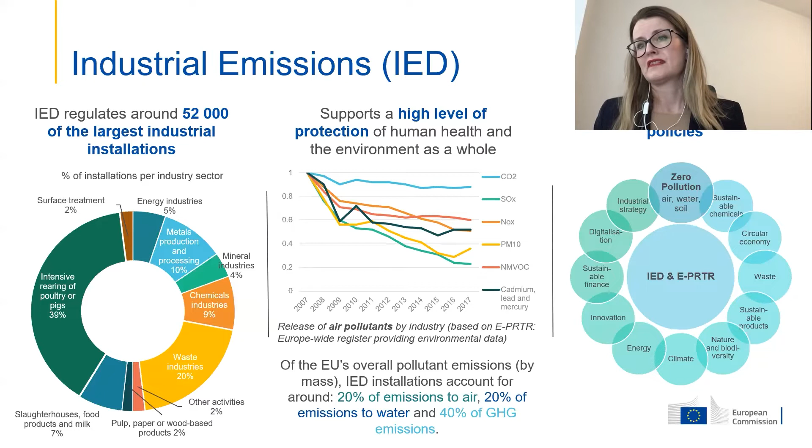The Industrial Emissions Directive and the European Pollutant Release and Transfer Register Regulation are two complementary instruments. The EPRTR regulation establishes a database with data on annual mass emissions of pollutants to air, water, and waste transfers from installations that are under the IED at EU level and wider.

The main objective of the EPRTR is to inform the public on environmental data, which also enables their participation in the decision-making process. All this information reported to the EPRTR from industrial installations is available under the Industrial Emissions Portal.

The portal now replaces the EPRTR website and is managed by the European Environment Agency. In the portal, you can find various analyses of reported data, including comparisons between specific pollutants, for example at sectoral level or at member states level, etc.

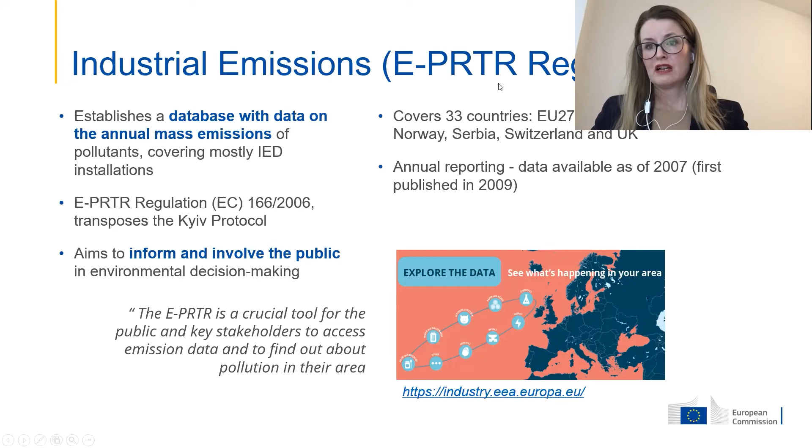Waste sector has been regulated under the IED since decades. It has been strictly regulated, maybe more than any other sector. Chapter 4 and Annex 6 of the Industrial Emissions Directive provide minimum requirements for plants that incinerate waste.

Those requirements are emission limit values, a safety net, in the form of daily and half-hourly averages. The IED also provides monitoring requirements and process conditions that have to be fulfilled, mainly related to minimum temperature and residence time to ensure destruction of harmful substances. It also provides rules for assessment of compliance with emission limit values set out in the permit.

Another chapter of the Industrial Emissions Directive, Chapter 2, obliges installations listed in Annex 1 to apply best available techniques. These best available techniques for the waste incineration sector are described in a Commission implementing decision establishing BAT conclusions for incineration of waste, adopted and published in December 2019.

This is a legally binding document, so BAT conclusions are legally binding, and permits must be updated within 4 years after publication, meaning by December 2023. After that date, emission limit values in permits must not exceed BAT-associated emission levels from the BAT conclusions. Derogation is possible, but only in specific and justified cases according to Article 15.4 of the IED, so only derogations from BAT-associated emission levels from the BAT conclusions can be possible.

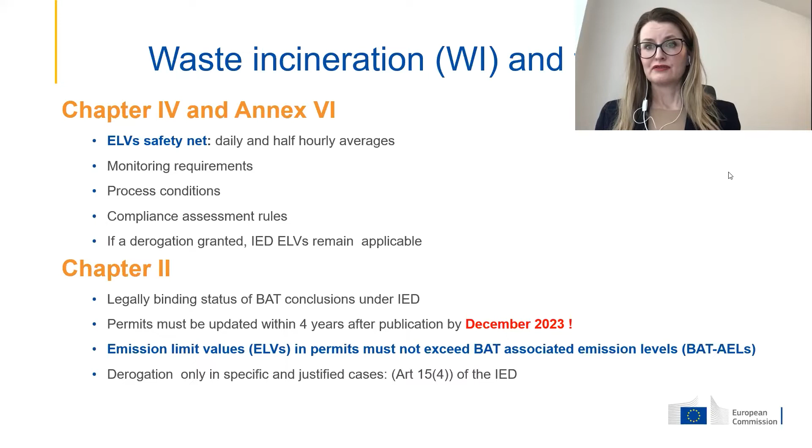This slide provides a summary of new requirements under the BAT conclusions in comparison with minimum requirements under the IED. The BAT conclusions contain BAT-associated emission limit values for air and water emissions.

These values are given in a range of emissions, and these levels are stricter than the minimum requirements under the IED. In that way, the level of environmental protection will be improved for pollutants regulated under the BAT conclusions.

BAT conclusions also provide BAT-associated energy efficiency levels, differentiating between levels for new and existing plants. There are also specific provisions in the BAT conclusions for the recovery of valuable materials from bottom ashes.

It is important to mention that provisions related to monitoring are more demanding under the BAT conclusions. In particular, this is related to toxic and persistent organic pollutants, such as dioxins, furans, and PCBs.

BAT conclusions also provide for improved sampling procedures for mercury and dioxins, furans, PCBs, and dioxin-like PCBs, which also cover conditions other than normal operating conditions. There are also requirements under the BAT conclusions for periodic monitoring of other harmful and toxic substances, and for continuously monitored pollutants, the BAT conclusions set only daily levels, daily ranges for BAT-associated emission levels.

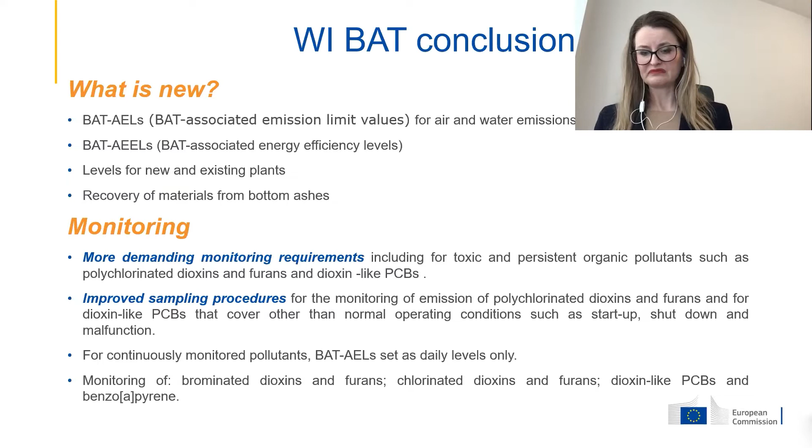I will conclude my presentation with the IED and EPRTR revision. This has been a long process, started at the beginning of 2020, and the current state of play is that we have finalized both impact assessments, and the Commission has adopted and published both proposals 2 days ago.

The objective of the revision was to transform the IED and EPRTR into forward-looking legislation, to accompany industrial transformation but also to fulfill the ambition under the European Green Deal and Zero Pollution Action Plan.

The proposed amendments to the IED and EPRTR aim to enhance the IED's effectiveness, to support innovation, to enable circular and resource efficient and less toxic production, but also to support decarbonization. On top of this, the new proposals are also widening the scope to ensure that both IED and EPRTR sectoral coverage is up to date.

I would like to highlight a few aspects now introduced by the new amendments, related to increasing the ambition in permits to ensure that the whole range of BAT-associated emission levels is used.

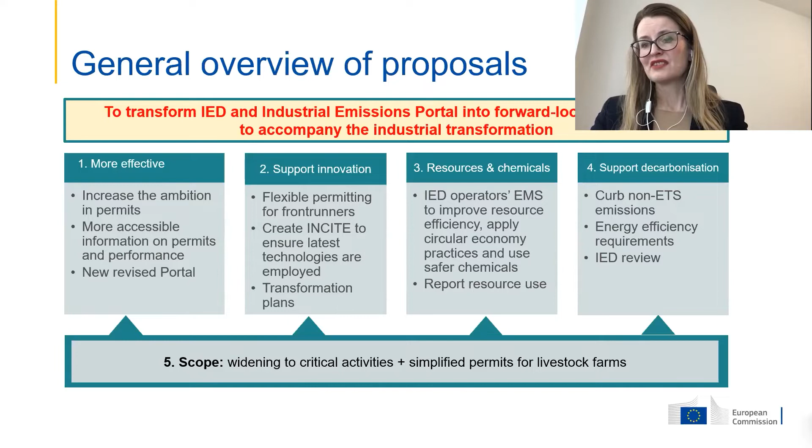So with this, I would like to thank you for your attention, and I will be happy to answer any questions later. I give back the floor to the chair of this webinar.

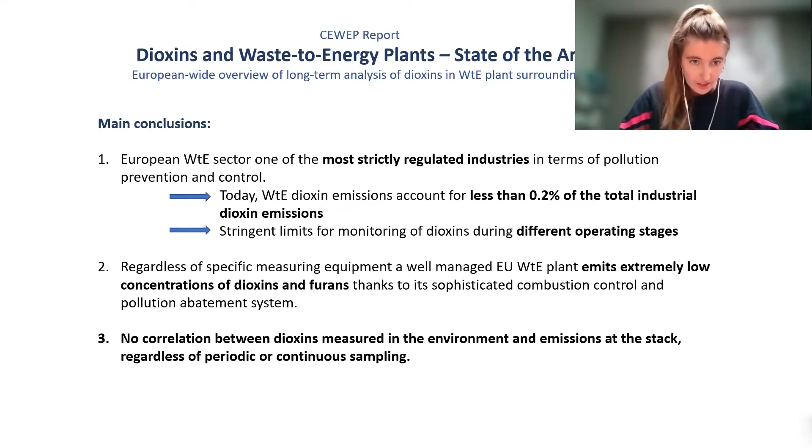Next slide, so we can go into more detail for the first conclusion. As mentioned, the sector has long been associated with dioxins, but since 1989, European waste-to-energy plants have been subjected to specific stringent legislation to prevent and control pollution. Throughout the years these requirements have been continuously tightened, and in 2019 the waste incineration BAT conclusions, as previously mentioned, went even further and set more ambitious targets regarding dioxin emissions. It is also specified that emissions must be monitored during conditions other than normal operating conditions.

It is very clear that this has led to a great historical decline, as well as other sources of dioxin emissions becoming more prominent. This can also be observed in the graph on the left, put together by the European Environment Agency, where the waste-to-energy sector is included in the energy production label, colored red. It's maybe not very clear, but you see it very prominently in the beginning of the graph, and then not so much later on. So their contribution has declined significantly.

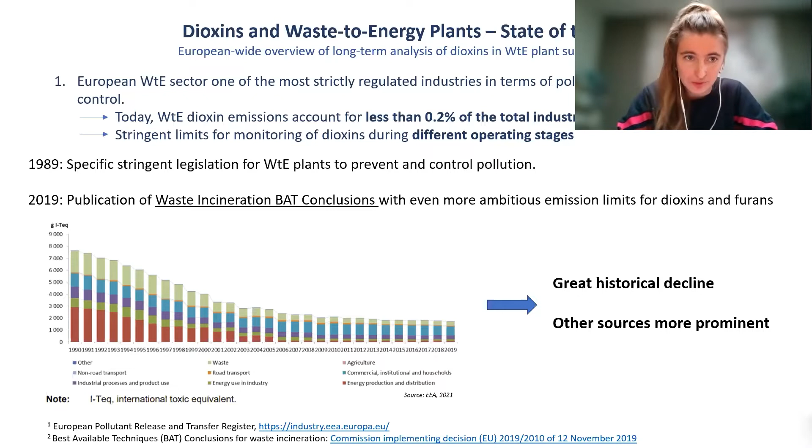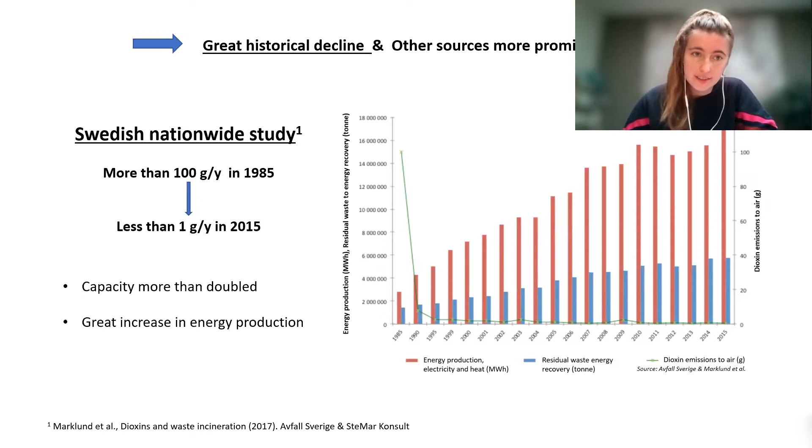Next slide. This goes a bit more into detail on the drastic historical decline with a specific case study from Sweden. To dive straight into the numbers, they went from more than 100 grams of dioxins emitted per year in the mid-1980s to less than 1 gram per year in 2015, clearly illustrated by the green line on the graph. You must also take into account that these low emission levels are maintained while the sector's capacity has more than doubled.

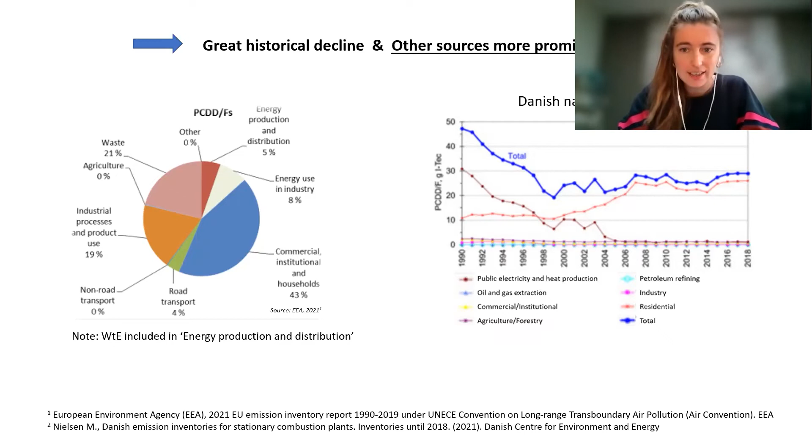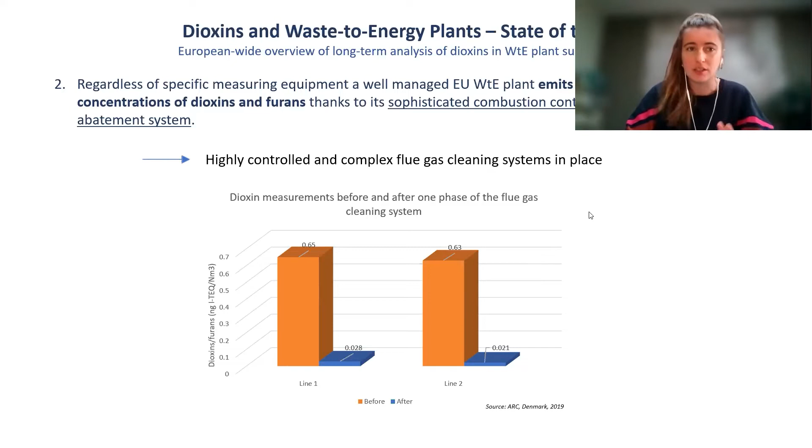For the second conclusion, it mentions the extremely low dioxin emissions due to the sophisticated combustion control and pollution abatement system. Simply put, waste to energy plants have highly controlled and complex flue gas cleaning systems in place. To illustrate this, you can see in the graph dioxin measurements before and after one step in the cleaning system. Orange is before, blue is after. It's quite clear that there is on average a 96% reduction for only one phase in the system, so it really is very well controlled. These measurements were also taken in flue gas cleaning systems of a waste to energy plant in operation.

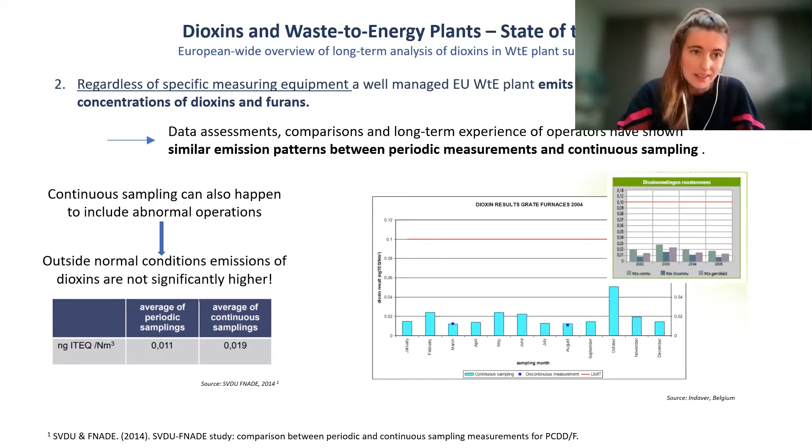Next slide. The conclusion also mentions that the low emissions are measured regardless of specific measuring equipment. This means similar emission patterns between periodic measurements and continuous sampling are found. If you're not familiar, periodic measurements of dioxins are sampled over a short period, like 6 to 8 hours, while continuous sampling is carried out over longer periods, ranging from 2 to 4 weeks. These longer periods can also happen to include conditions outside of normal operations, for example startup or shutdown. When comparing the averages, the measured dioxin emissions are not significantly higher, meaning the same results are obtained with either monitoring method.

Next slide. Now we arrive at the last conclusion, which reads that there is no correlation between dioxins measured in the environment and emissions at the stack, regardless of periodic or continuous sampling. The sampling part we've already covered, but it's quite interesting that while environmental samples provide a value for the amount of dioxins measured, it does not necessarily determine the emission source - more on that later, because this is an important point. Furthermore, the report includes different examples of biomonitoring for dioxins executed by waste to energy plants. I will not go into detail, but it includes sampling of soil, sampling of existing vegetation, or vegetation grown specifically for the purpose.

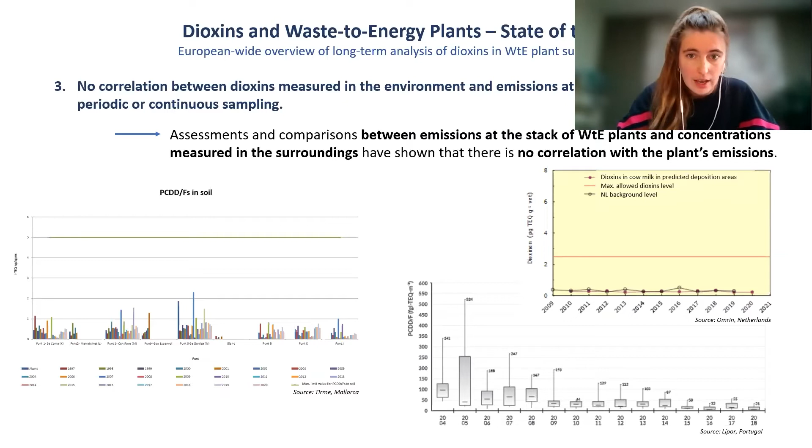Next slide. Here I want to go into more detail because it's quite an important point. Going back to the challenging task of identifying the emission source, it must be noted that it's not possible to guarantee the source of dioxin emissions solely based on the levels in biomarkers. Plus, the pollutant concentrations found in the sample can originate from both recent sources and also historical pollution, as dioxins accumulate in the environment over time.

For some processes, it is actually possible to identify the source based on congener patterns. Congeners are chemical compounds, or simply put, building blocks that are related to each other and can give more information on the origin of the chemical compounds. As dioxins cover a group of more than 200 compounds, you can set up a congener pattern for a sample, but also for an emission measurement.

This is the case, for example, for pulp bleaching. But for incineration of municipal waste, this is however not the case. And to go even further, all combustion processes show similar congener patterns, regardless of the input waste. Similar patterns have also been found in metallurgic industrial processes. So the pattern on the right shows that it doesn't differ significantly from the pattern for traffic emissions.

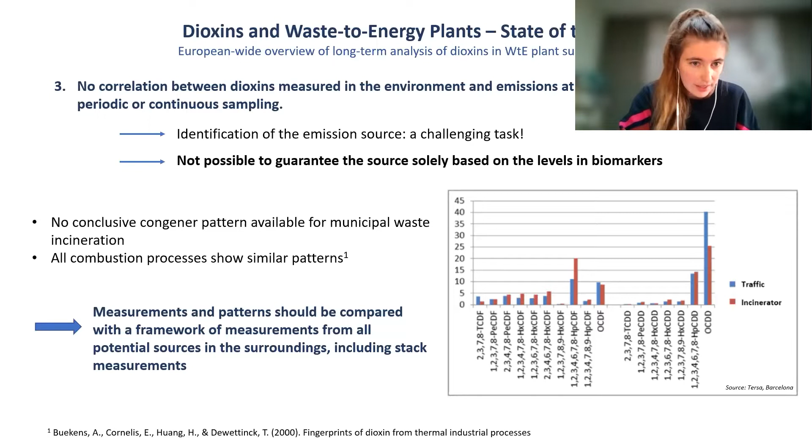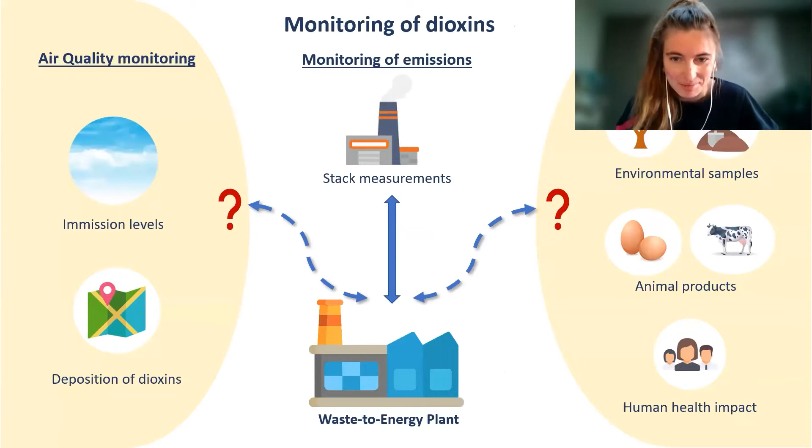This is my last slide, but it's just a quick overview of the direct emissions that are directly linked for monitoring, and then the environmental samples or air quality monitoring, where you're unsure how to identify the emission source. It's a bit wrapped up at the end, but I think that is it for me. Thank you for your attention. If there are any more questions, I'll be happy to answer them later on.

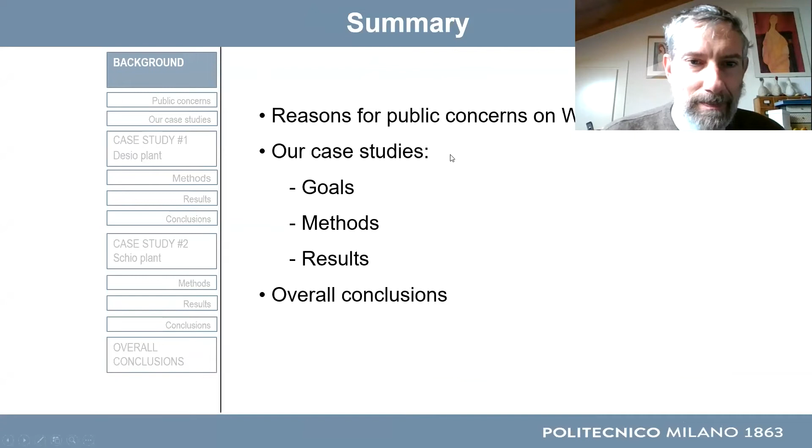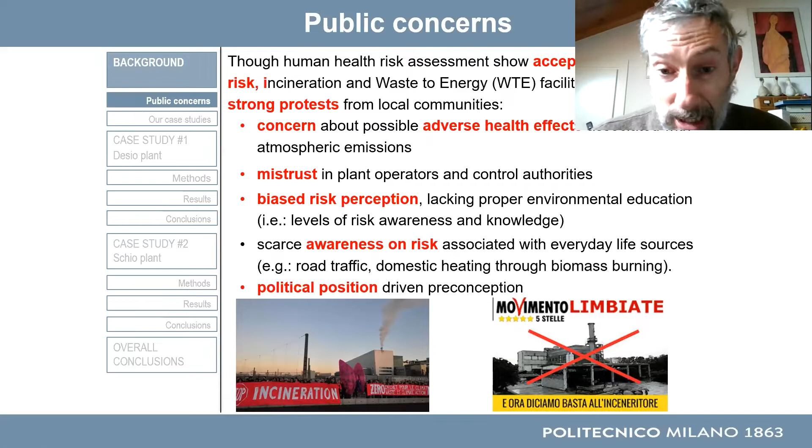I think that all of you are aware of the different kinds of public concerns against WTE plants. I would like to stress the point of awareness on risk that sometimes is not so clear in public opinion. People may be more keen to be afraid of things like WTE plant emissions than other common activities we have, like road traffic or domestic heating, namely when we have biomass burning.

I will show you some outcomes of a couple of studies we had, two case studies in Northern Italy. These studies had a common goal: to assess the real impact of the plant on local air quality. They shared common methods, namely from the dispersion modeling standpoint we used the CalPuff model. Another important point was that we based our simulation on real emission data taken from the continuous emission monitoring systems. In these two case studies, we had two different goals.

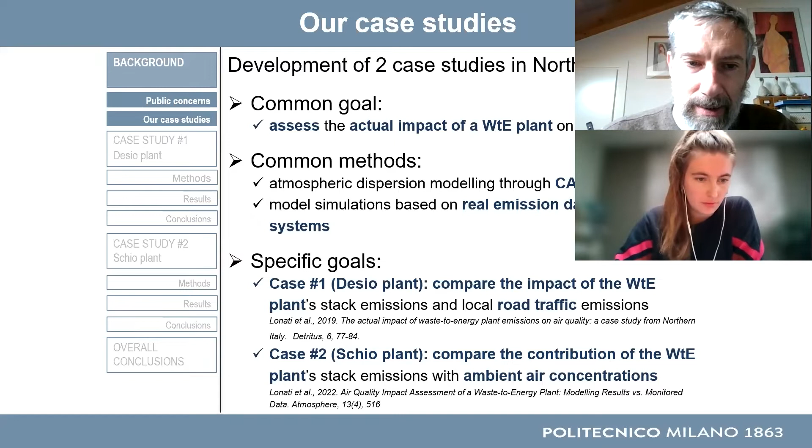In case 1, the study was intended to compare the impact of the plant emissions with local road traffic emissions, so it was just a simulation exercise. In case 2, the idea was to compare the estimated contribution of the plant emission through modeling with monitoring data, in order to have some idea of the relative contribution of the plant emissions to the actual air quality conditions.

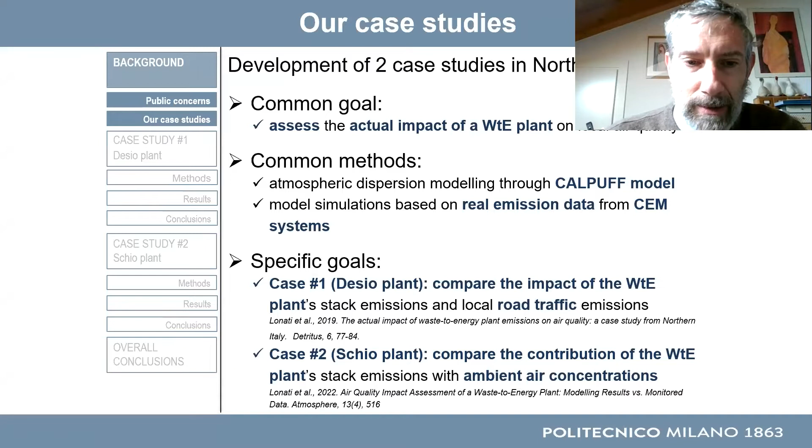I will go very fast on the results, but if you want detail, all these studies have been published. They are on open access journals, so you can have a look and find all the details you may be interested in. Next, please.

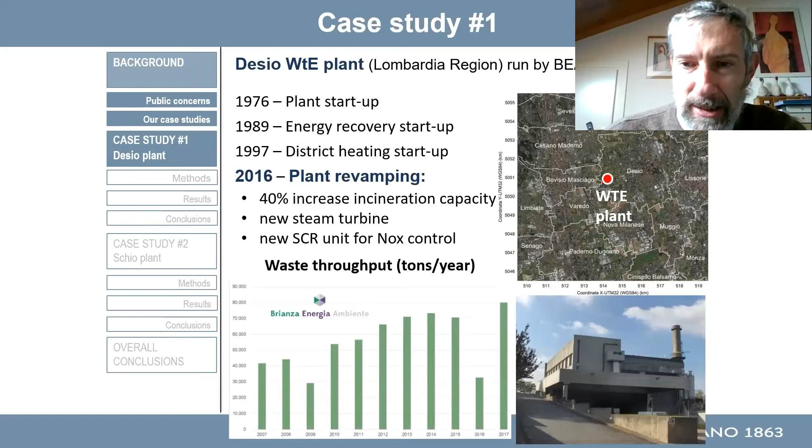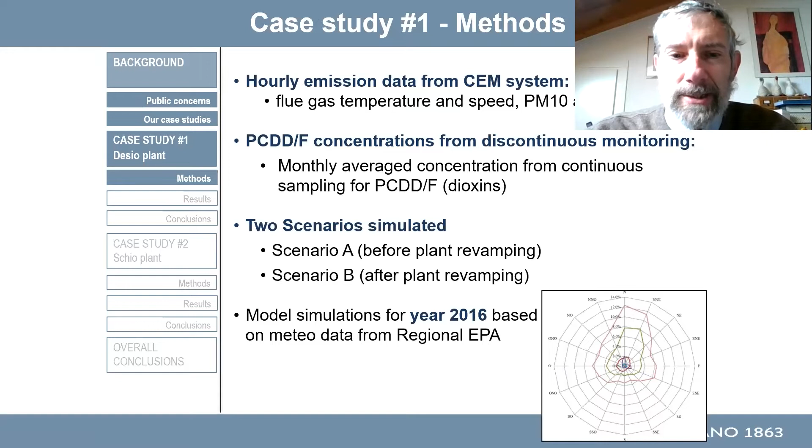The plant is located north of Milan in the Lombardy region. As I mentioned, we took data from the CEM system, and for those pollutants that are routinely measured, PM10 and NOx, we relied on hourly emission data; for dioxins we used discontinuous sampling data. We had simulations for calendar year 2016.

Here you can see that the revamping of the plant resulted in a decrease of emissions on average and in absolute terms, in maximum levels, from scenario A to scenario B, except for PM10, because we had an increase in waste throughput. So there was a mismatch between increased emissions and controlling, which was not addressed because the intervention focused on NOx.

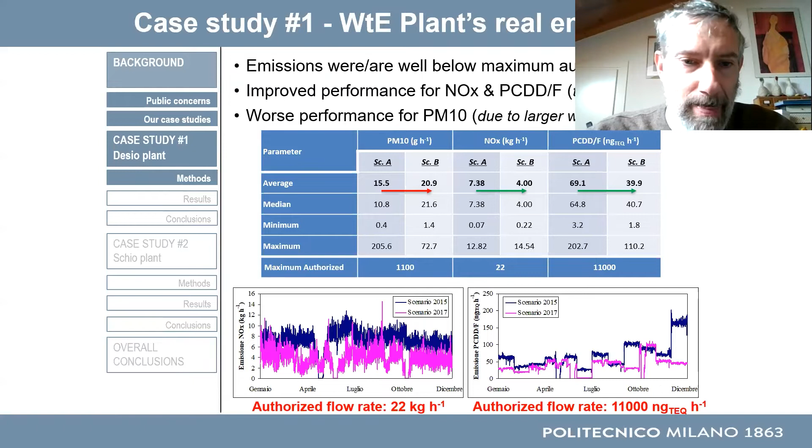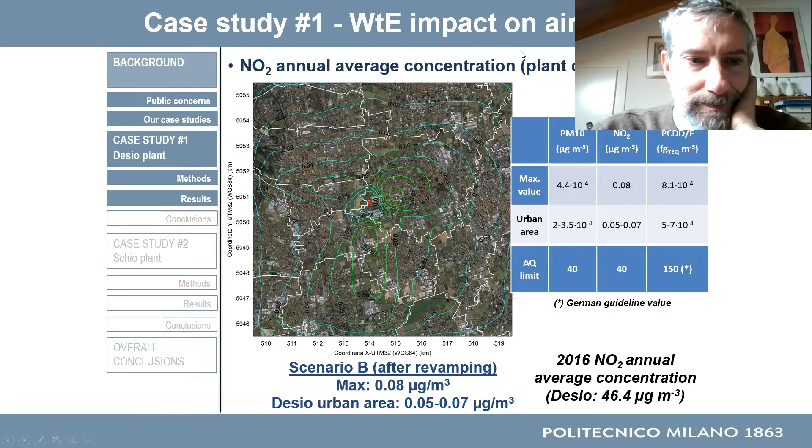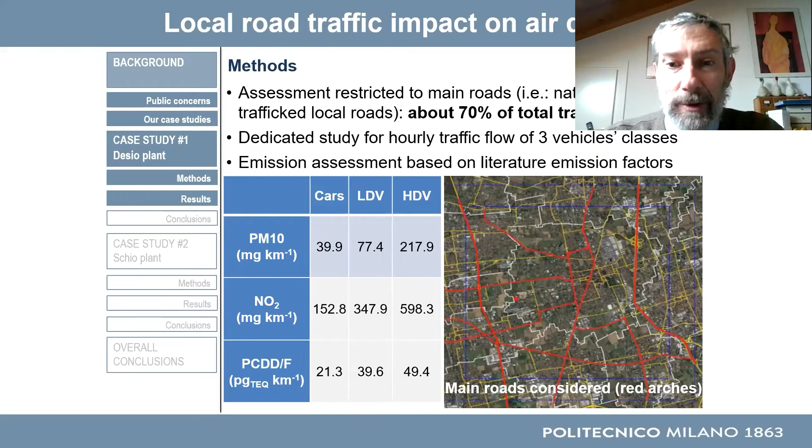You see that the impact of road traffic is in the order of dozens of micrograms per cubic meter at the maximum fallout point, whereas in the urban area it's in the order of some micrograms per cubic meter, compared to a 100 times lower contribution from the waste-to-energy plant. It's the same or even more in the case of PM10, where the ratio is 10 to the minus 4.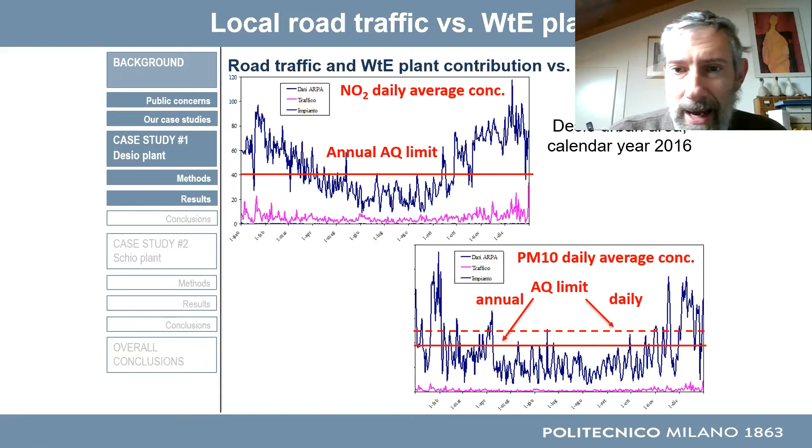To summarize the conclusions from this first study: the revamping of the plant resulted in a positive effect in terms of reduction of emissions, and also reduction in specific terms, per ton of waste burned. So not only in terms of concentration, but in terms of efficiency of the process.

We also saw that the contribution of the plant to overall air quality is very low, and very low also in relative terms compared to local traffic—when I say very low, I'm dealing with orders of magnitude. This applies not only to criteria pollutants but also to organic and inorganic compounds. We also investigated cadmium, not shown here, together with dioxins, but we had the same results in terms of relative, comparative contribution.

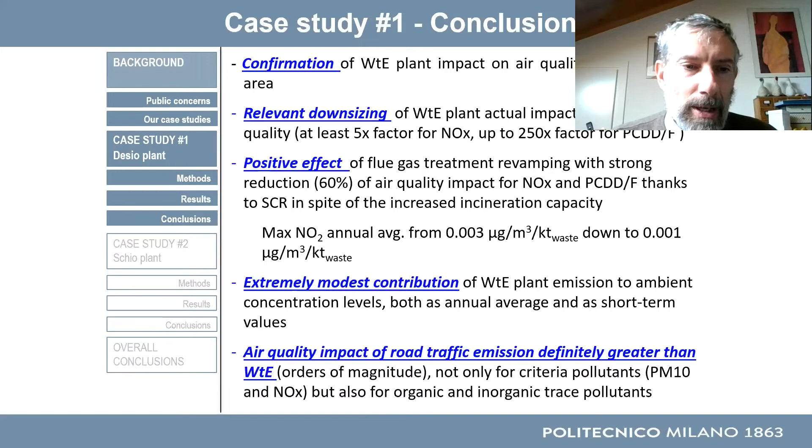The second was for a plant in the Veneto region, close to the mountains, with state of the art equipment, including SCR and the traditional dry treatment line, on 3 separate combustion lines, with a throughput of about 230 tons per day of waste.

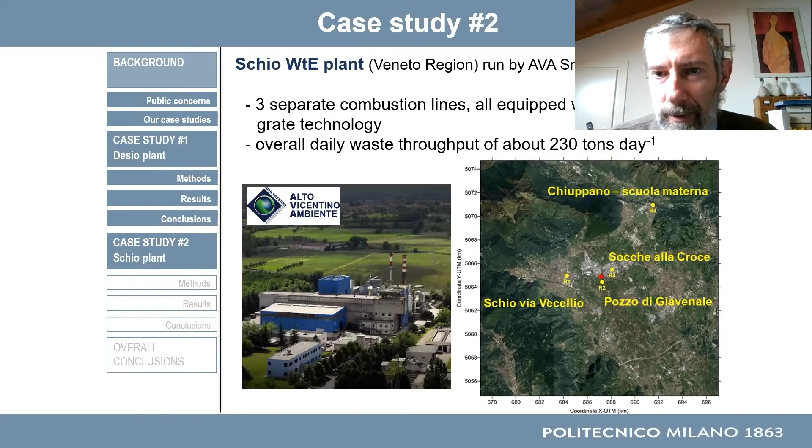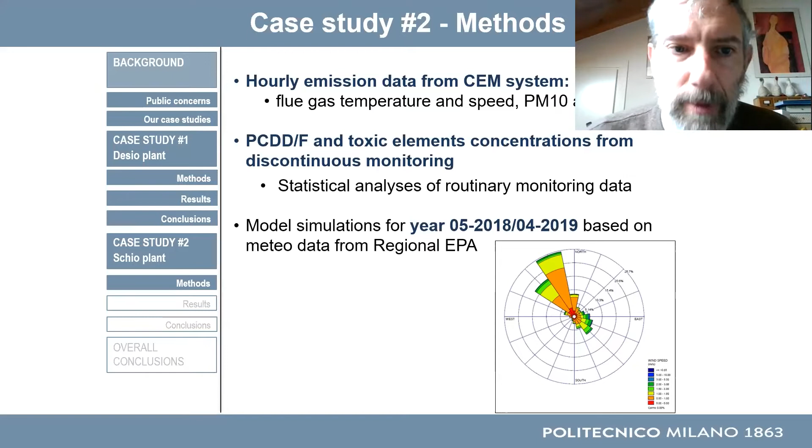We used the same methods. We relied on meteorological data. Actually, it was not a real calendar year because we were in between 2018 and 2019, since this was requested by local authorities. We also took data from routine monitoring data for PCDD/F and toxic elements.

We used discontinuous sampling, and we ran some statistical analysis, for example for dioxins, to properly describe the real emission conditions for these pollutants. Of course there is some variability, so we wanted to investigate this, not just take one single value, but make some deeper inference.

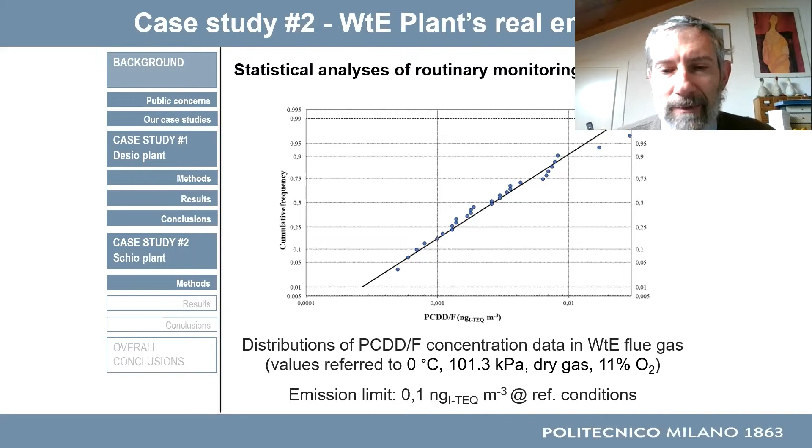We had monitoring data from institutional monitoring run by the local environmental agency for both criteria pollutants, continuous and periodic sampling, with daily samples throughout the year. That's about 60 to 70 daily samples over the entire study period, which is actually a year. We also had data from dedicated monitoring campaigns we performed for the managing company of the plant, and some other campaigns run by ARPA, the local environmental agency. These campaigns focused on toxic elements, benzo[a]pyrene, dioxins and furans, and also mercury.

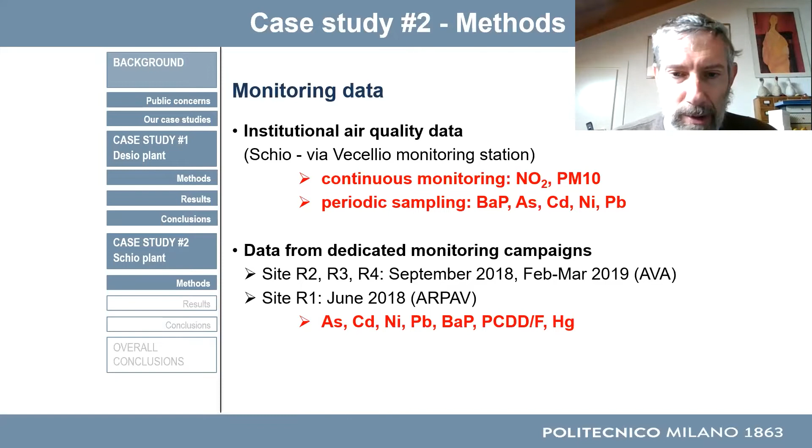I will not show it here, but we also had some total gaseous mercury monitoring.

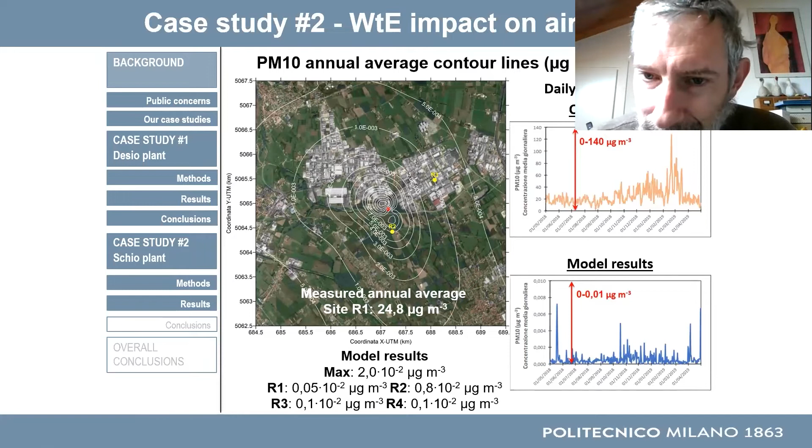The same, or even more so, for PM10: the greater the difference, the smaller the contribution of the plant. We are maximum in the terms of 0.01 micrograms per cubic meter, compared to normally 20 to 40 micrograms per cubic meter for ambient air, with some peaks up to 100 in critical conditions. So we have further confirmation that the impact of the plant is very small, as we saw in the previous case.

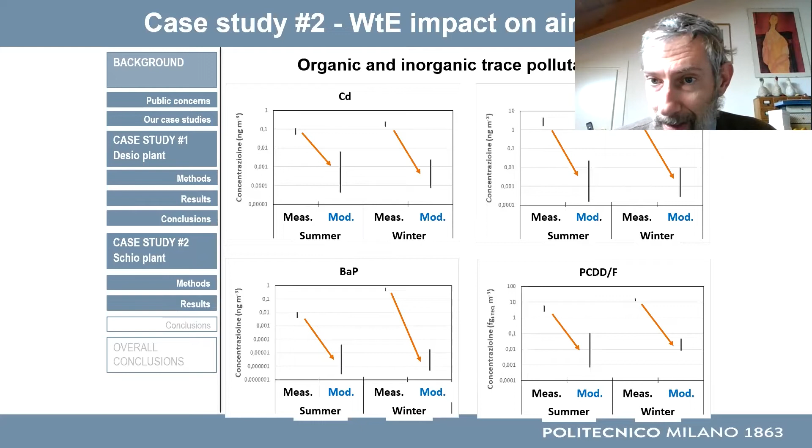This is also true for dioxin, where there are at least 2 orders of magnitude difference. So once again, the contribution of the plant is really marginal compared to ambient air levels. Actually, it's the complex of all activities in the area - residential biomass burning, road transport, and some industrial processes in that location - that are the most significant contributors to pollution levels at the local scale.

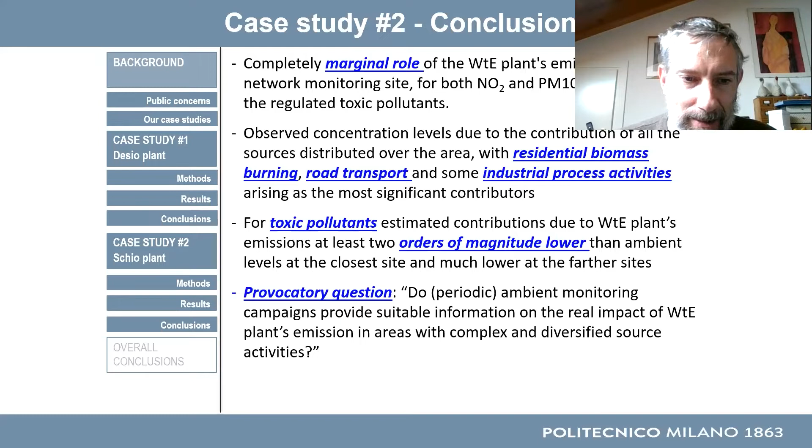I'd like to raise what I call a provocative question, which came out of discussion with the local air quality agency: does it make sense to have short monitoring campaigns, just snapshots of air quality, as far as dioxins and some toxic elements are concerned? Or, more formally, do periodic monitoring campaigns provide suitable information to really assess the impact of the plant when you are in a complex area with many different sources? We had some debate about that, and I will try to make a suggestion in my final slide with the overall conclusion.

And the conclusion is that, maybe in the last bullet point, monitoring coupled with modeling may be a good tool to assess and to keep control, or to have information about the real impact of the plant.

I would like to mention that in our simulation, we took continuous monitoring system data as they are, so there was no further processing, as sometimes happens, in order to not consider transitory periods or whatever. So we took all data measured and we modeled that, in order to really assess, or if not the real, the most close to the real impact of the plant.

And the final point is that, of course, the plants we studied in our case studies were not very big plants, but they were state-of-the-art, recently revamped with state-of-the-art technology, according to best available techniques.

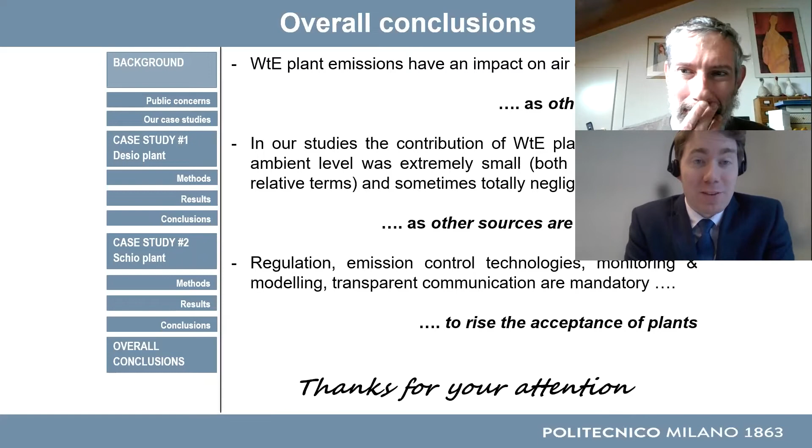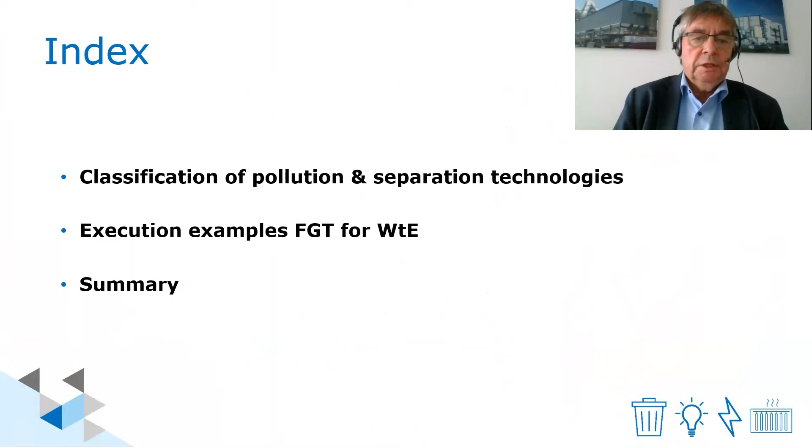Good morning, everybody. The topic of my presentation is flue gas treatment for waste to energy plants, the used technologies. I want to start with the classification of pollutants and an introduction of separation technologies, followed by some execution examples with measured values, and a brief summary.

You can classify all these compounds into, let's say, 4 or 5 classes. The first part of flue gas treatment starts already in the combustion zone with oxidizing CO and organic compounds, and all the other classes are mainly removed in a flue gas treatment downstream of the waste to energy plant, or the heat recovery boiler, or even inside of it.

So the first class are the pollutants in solid form. This is fly ash, heavy metals in solid form. Then we have pollutants in gaseous form, that's the acid components, HF, HCl, SO2. These compounds are removed by adding an additive, which gives a chemical reaction, and you form salts, which you can then easily remove in solid form.

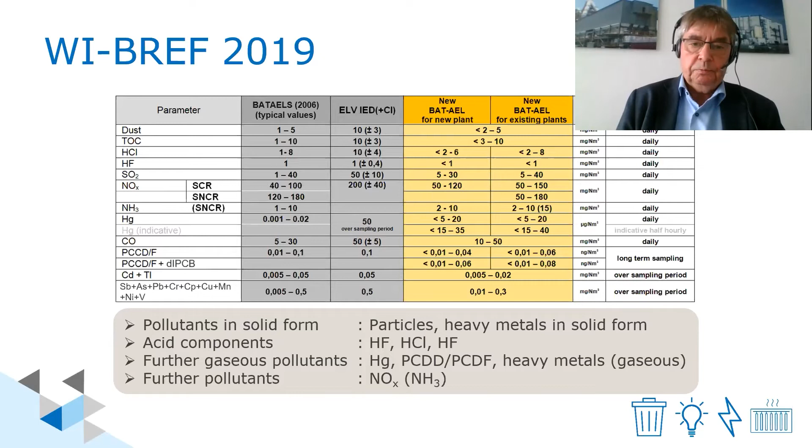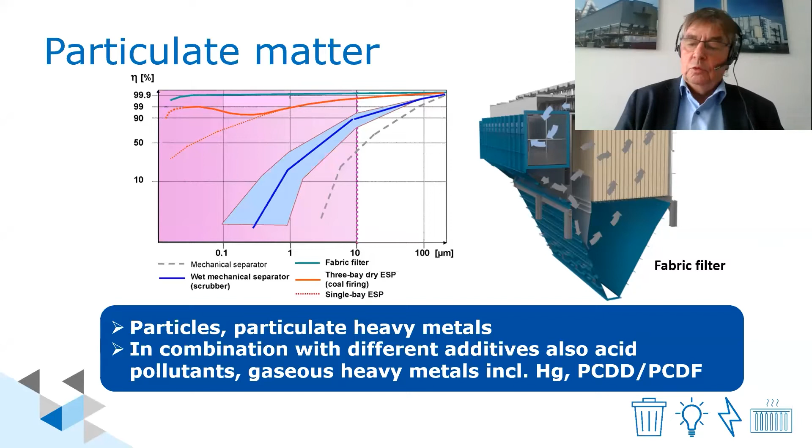As already mentioned, you can remove the pollutants in solid form, but also pollutants in gaseous form, if you convert these pollutants to solid form, as you do in these sorption processes. Here you have different options.

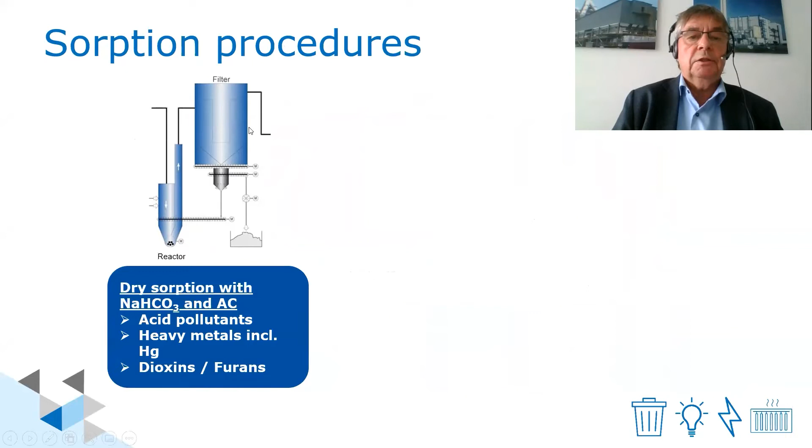The first one is a dry sorption process using sodium bicarbonate. This is baking powder, for the acid, and active carbon for mercury and PCDD, PCDF. It consists of a reaction chamber where you introduce the additives, a filter, and a multiple recirculation.

The second option you have is a conditioned dry system. Instead of sodium bicarbonate, here you use hydrated lime. You see more or less the same scheme: the reaction chamber where you introduce the two additives, the bag filter, multiple recirculation. The difference is that you moisturize a little bit, recirculating particles to improve the efficiency.

Last but not least, you have, of course, the option of a wet system, wet scrubber based on sodium hydroxide or even limestone.

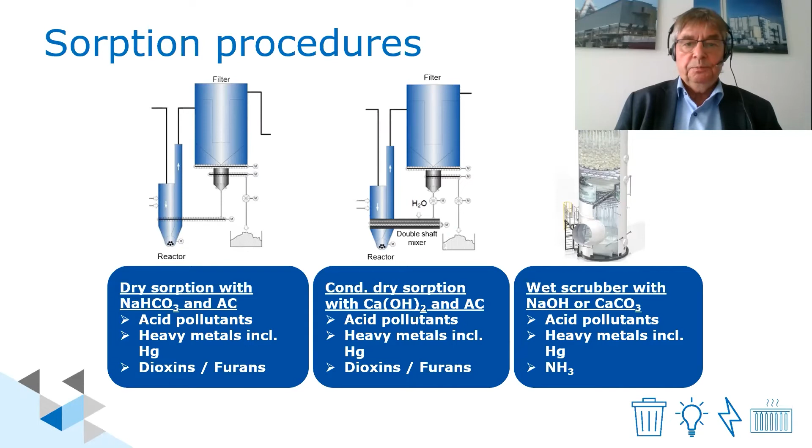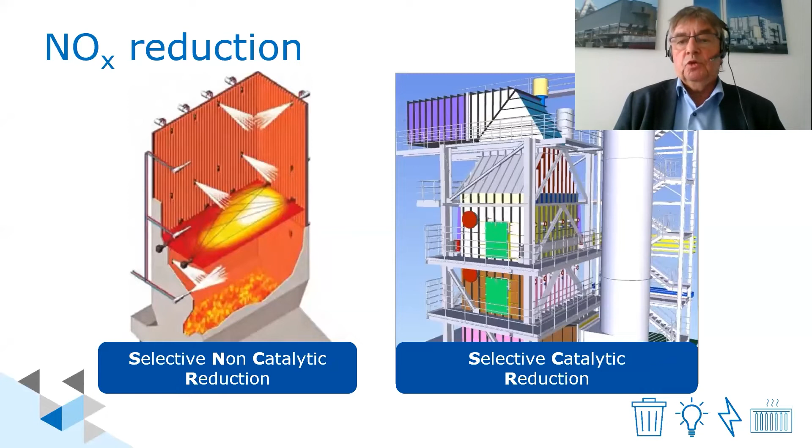Last group are the NOx, which has to be reduced to N2. This you do with injecting ammonia. You have two options: the first is to do it in the combustion chamber at hot temperatures in a selective non-catalytic reduction, or the other option is to do it within the flue gas treatment system downstream of the heat recovery boiler, where in the temperature range of 200 to 240 degrees you need a catalyst system to support the reaction.

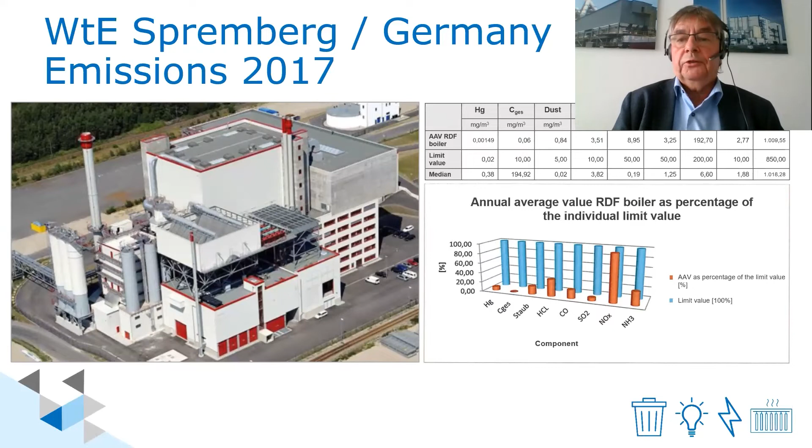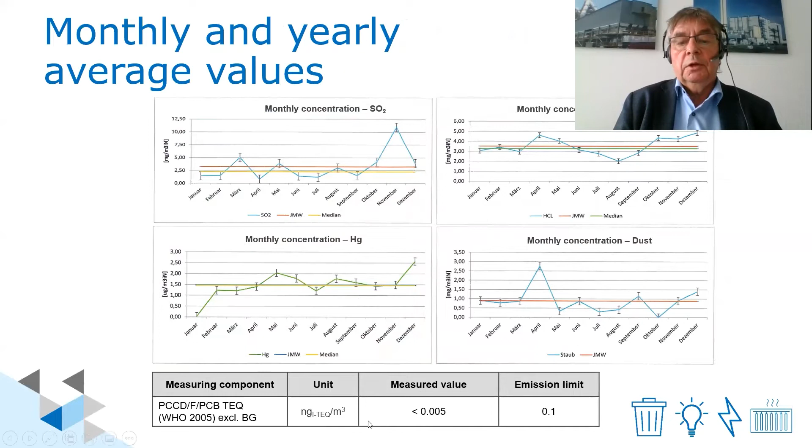I have here for 4 of these compounds also the monthly concentrations for SO2, HCl, mercury, and also for particulate matter. What you can see is that there are variations over the months of the year, but all the values are far below the requested emission limit values. I added here from this report as well the dioxin measurement.

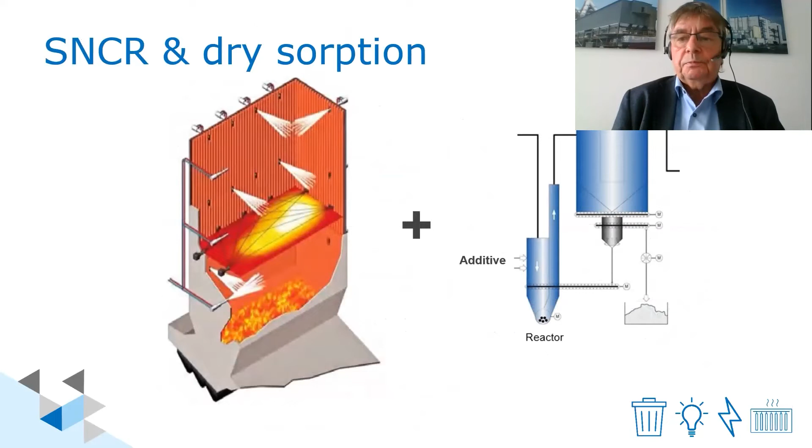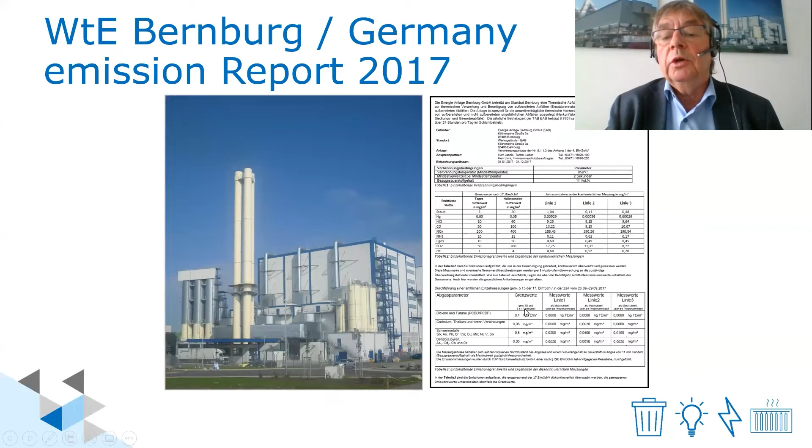Second example is an SNCR technology with dry sorption, meaning usage of sodium bicarbonate and activated carbon. Also here, an emission report from 2017. It's a plant with 3 lines. As well here, you see in this part all the continuous measured values, and here the values measured by sampling periodically. If we look, for example, for this dioxin or the heavy metals, they are all far below the requested emission limit values.

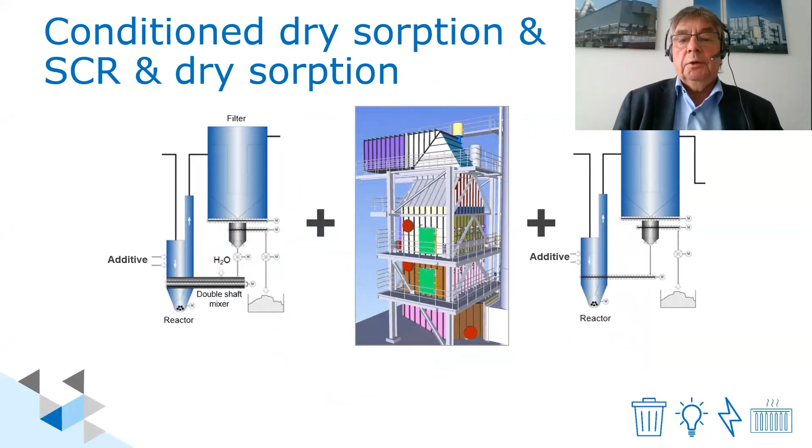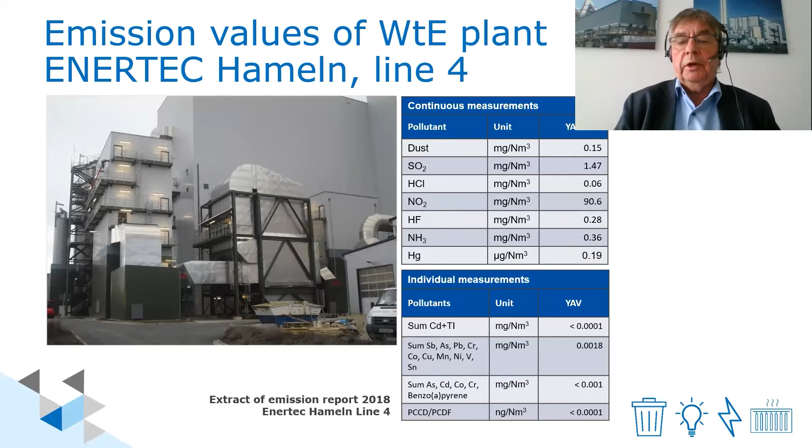Same for these compounds which are measured by sampling. Last but not least, one more example, and this is a combination of SNCR, conditioned dry system, and a wet scrubber. This is a very common combination of technologies used in the north part of Europe, because in the last stage, the polishing scrubber, you can remove highly efficiently the remaining HCl and SO2, the acids, and this in combination also with heat recovery, because you can use the condensing heat generated here in the water of the scrubber, in the water loop of the scrubber, and give it to district heating. This gives you a very high energy efficiency as well.

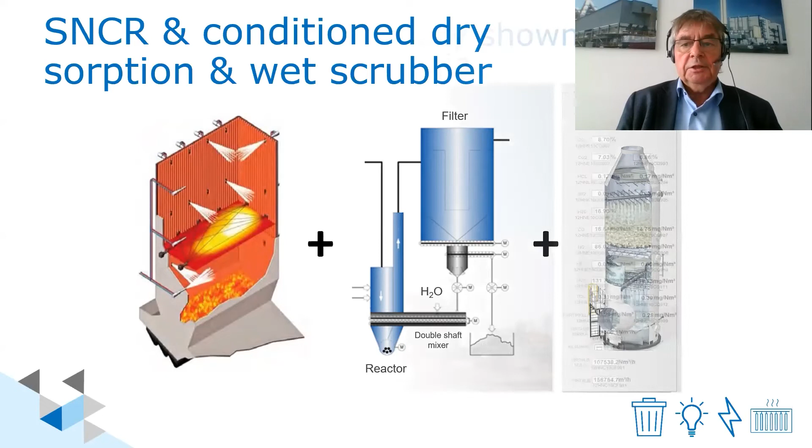A very brief summary: there are several different technologies available to remove pollutants, and these technologies are listed in the waste incineration BREF as BAT. All these combinations of technologies in operation reliably fulfill today's and future requirements. The selection of technologies is made depending on the application.

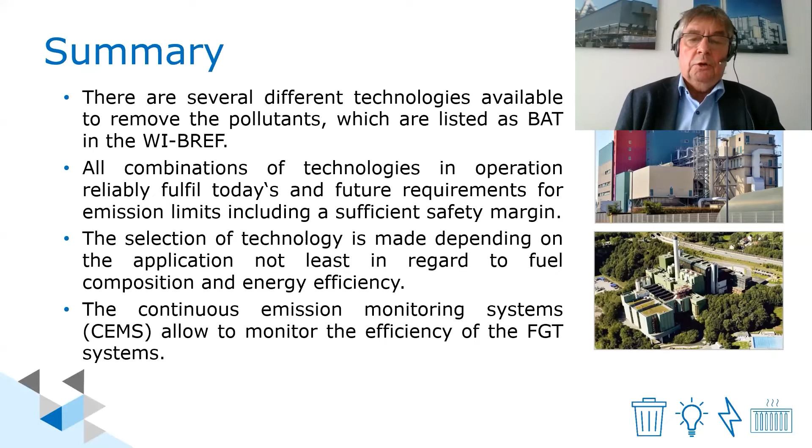Two of these considered factors are the fuel composition and energy efficiency, and last but not least, for most of the pollutants we now have continuous emission monitoring systems, which allow us to monitor the efficiency of the flue gas treatment systems, including sufficient safety margin as seen in all these reference examples. With that, I'm at the end of my presentation. Thank you for your attention.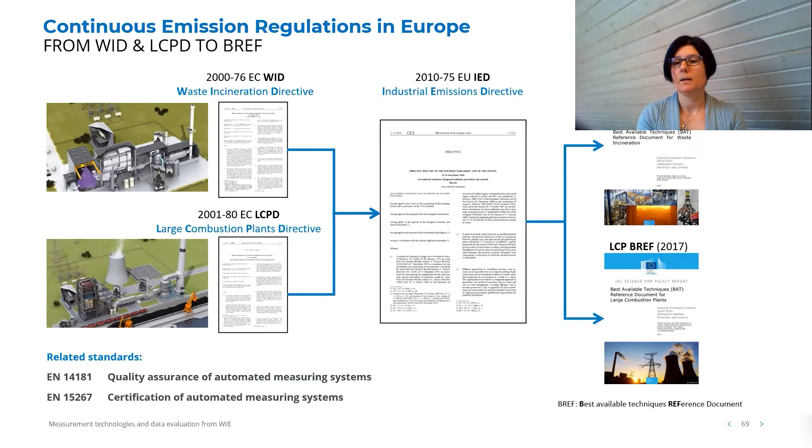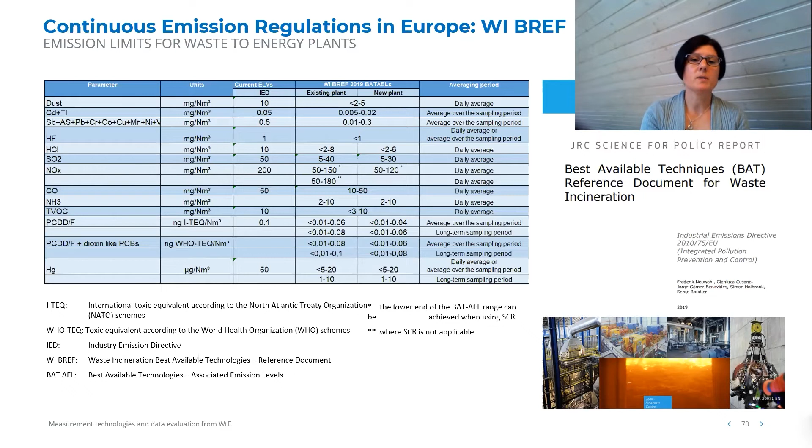This is an overview of the BAT conclusions from the BREF waste incineration. We have seen it before already, so I will not go into detail, but the BAT conclusions, as said before, are legally binding to set the emission limit values for waste to energy plants within the permits. We see that there are several components with very low levels that must be continuously monitored or measured periodically, depending on the components.

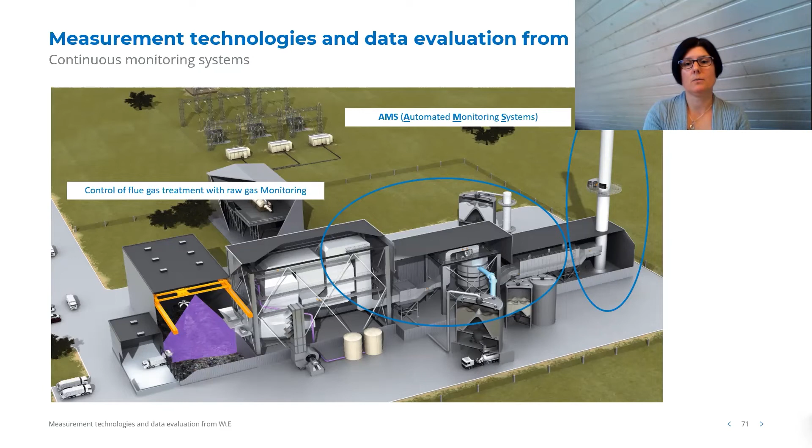So waste to energy plants are controlled using a continuous monitoring system that can be used either on the raw gas side to control and optimize the flue gas treatment of the waste to energy plants, or for automated monitoring systems to control the emission levels and compliance with the emission limit values required by European regulations.

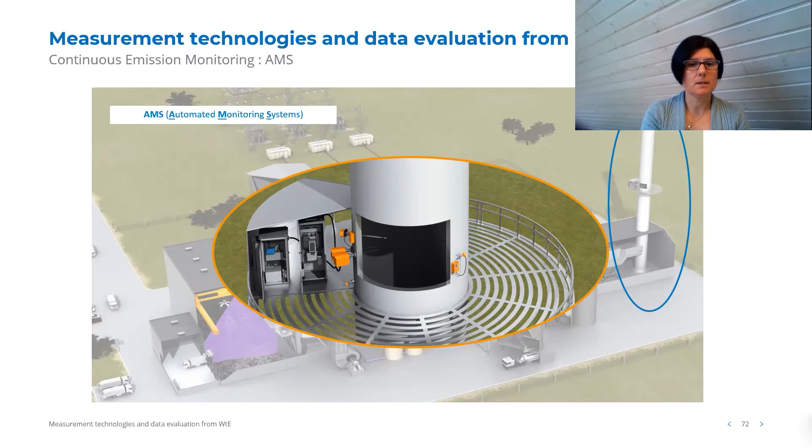What we understand under AMS: these are all the gas analyzers or flow meters necessary to control all the parameters required by the IED and BREF for the emission of waste to energy. On the next slide, we will see a typical AMS, which measures, stores, evaluates, and reports all the required values from the emission.

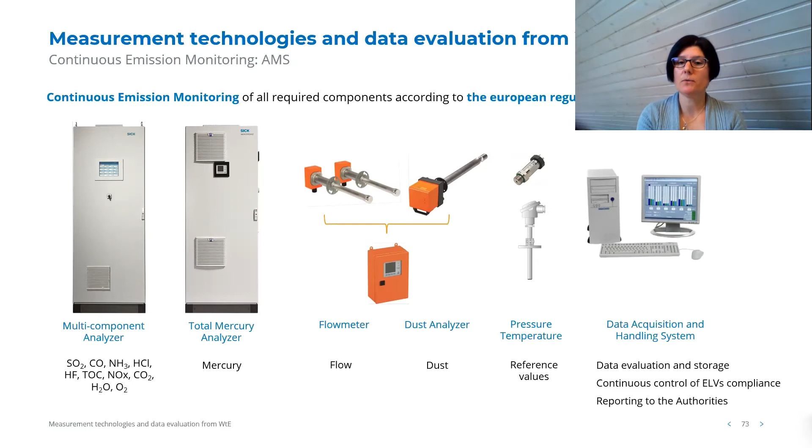So here we see a multi-component analyzer that can measure simultaneously and continuously several parameters. Here we have 10 parameters. We can have an analyzer to measure total mercury content continuously when required, a flow meter, a dust analyzer, some sensors like temperature and pressure which are used as reference values for calculations, and at least a data acquisition and handling system to provide all the required data evaluation and storage for the continuous control of emission limit value compliance, and of course for reporting to the authorities.

After installation and commissioning, it must be ensured that the AMS is set correctly. For this, a kind of calibration is realized — this is the so-called QAL2. The QAL2 is done by accredited laboratories to check the calibration, and during the QAL2, 15 comparative measurements are taken using a standard reference method, and a calibration curve is created.

This QAL2 must be repeated every 3 years for waste to energy plants. After this calibration, and during 1 year, we have an ongoing quality assurance with zero check and span check — this is the QAL3. This QAL3 is under the responsibility of the plant operators, and it is done according to the supplier instructions and the maintenance interval defined during the certification process of the AMS.

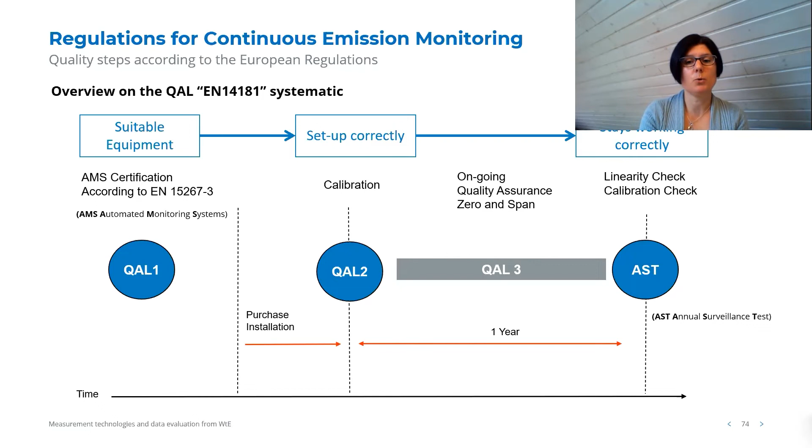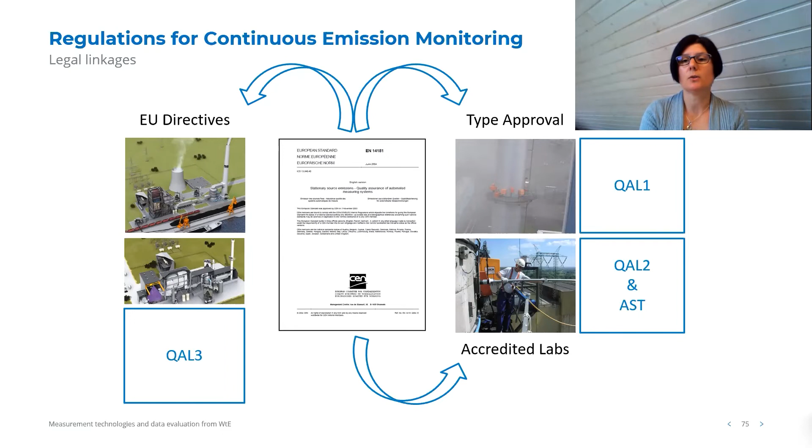So here we see the interconnection between the directives and standards, especially the quality assurance standard EN 14181, which is used by the IED and on site for the ongoing quality assurance with the QAL3 check, and on the other side for the type approval of each AMS with the QAL1 certificates, and of course for the ongoing check like QAL2 or AST that are done via accredited labs.

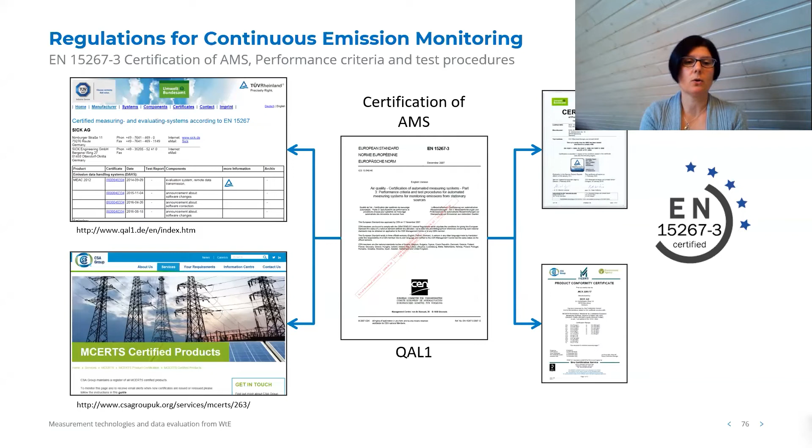So we have seen before that the AMS must be certified according to EN 15267 part 3. This certification is done by certified bodies, for example the TÜV in Germany or the CSA group testing in UK, and each certificate is available on the respective website - here on qal1.de for the TÜV certificates, and here on csagroupuk.org for the MCERTS certificates.

Here you have an overview about the performance criteria that must be fulfilled by all analyzers used for AMS. The certification test is realized in two steps: one under laboratory conditions and one under field conditions. Some of the criteria are the response time from the entire AMS - that means not only the analyzer but also the measuring gas line or the sample gas filters for extractive analyzers - the repeatability with standard deviation at zero and span point, the linearity of the analyzers, the zero and span drift, and the influence of several parameters is also tested with a limit that must be fulfilled. That's the case for ambient temperature, sample gas pressure, sample gas flow, voltage variations, or vibrations. All this performance criteria ensures that the AMS is working perfectly with good accuracy of the measurement, independently of the site conditions.

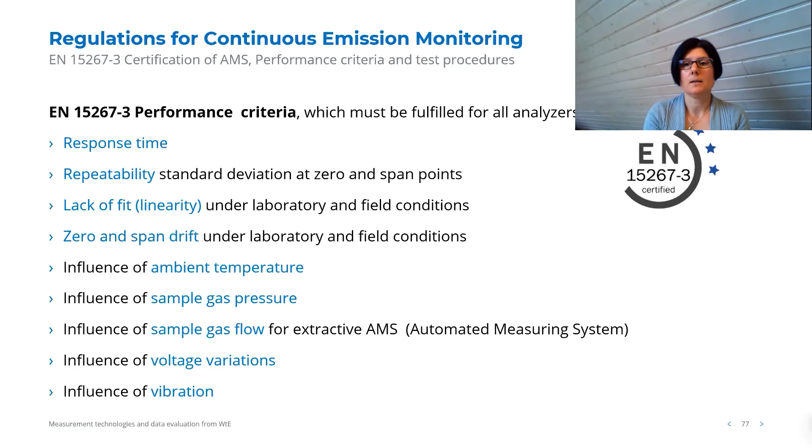So we have seen before that the certification as well as QAL2 and AST must be done by accredited laboratories. This accreditation is done according to European standard, the EN ISO IEC 17025, which is related to the general requirements for the competence of testing and calibration laboratories.

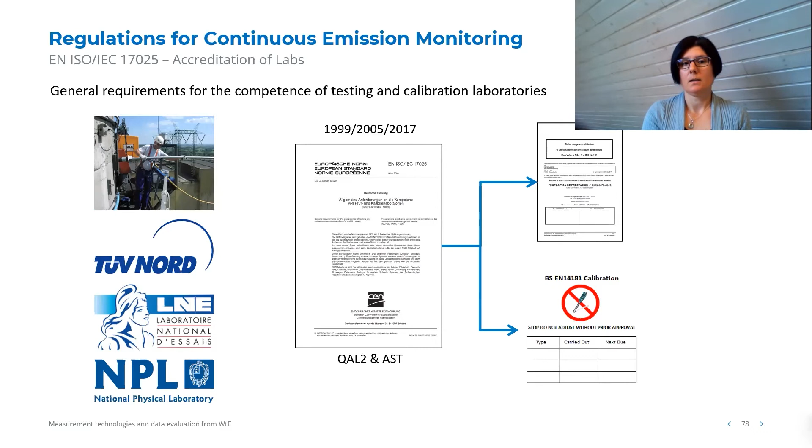So I come to my summary. We can say that the long-term stable low emissions from waste to energy plants are ensured by the continuous monitoring and reporting of emissions done with certified AMS, with regulatory reporting to the authorities and continuous data acquisition of the emission values, of course with the application of European regulation, especially the Waste Incineration BREF with the legally binding BAT conclusions, with the quality assurance of the AMS done according to European standards. So you have compliant hardware setup, compliant factory calibration, reliable on-site calibration, and an ongoing quality check during operation. At least only accredited laboratories are allowed to do the certification and the QAL2 test or AST. All of these steps ensure the reliability and transparency of low emissions from waste to energy plants in Europe. Thank you for your attention.